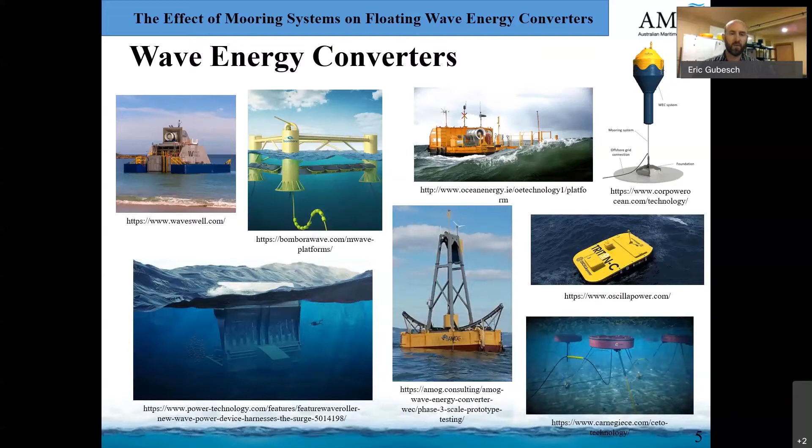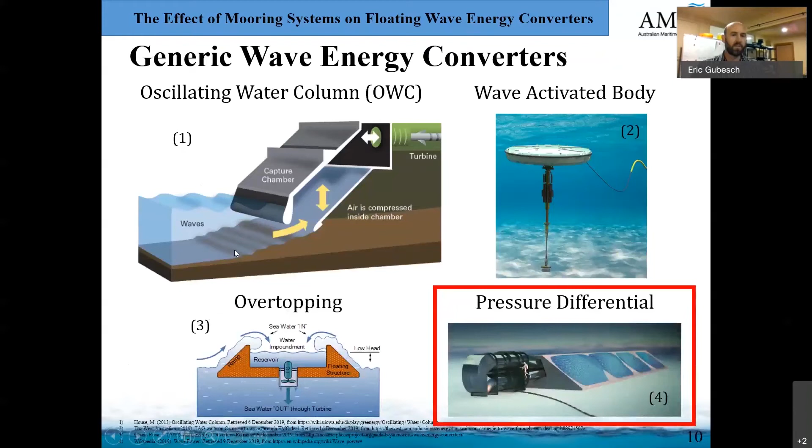So the device that I'm working with is the Oscillating Water Column. It's a very simple concept. There are no moving parts below the surface of the water. The operating principles are mechanical systems that we understand relatively well. For example, the water that oscillates up and down on the inside of the chamber is kind of like the way a piston behaves on the inside of an internal combustion engine. And the power takeoff system uses an aerodynamic turbine, which we have quite a lot of collective experience with how these turbines work.

Now, of course, there is a fair bit of learning to be taken because unlike a lot of other turbines, the oscillating water columns fluctuate relatively quickly with what the wave periods are doing. So you have different directions for how the turbines will interact with the flow of the air through the chamber.

Now, there's lots of academic research available for loads of different wave energy converters, including OWCs. But unfortunately, there are very few full-scale devices out there in the real world. And this makes it difficult to understand what the real-world performance is actually like for these devices. And when it comes to designing a new device or developing technology, performing a similar vessel analysis becomes challenging.

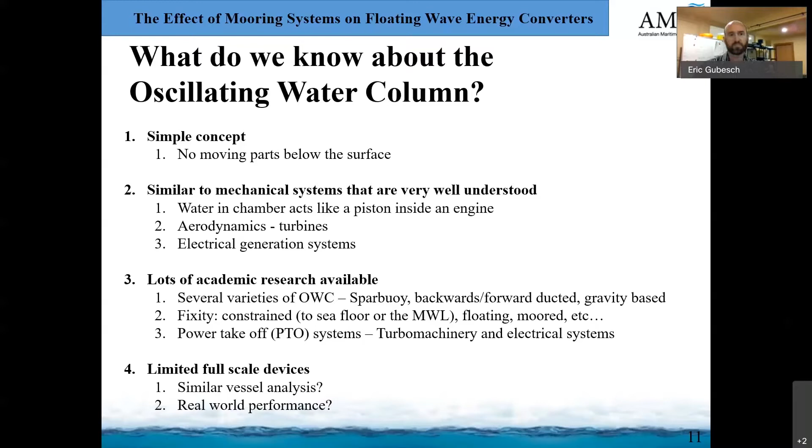So what I wanted to do was step through the design process that I used to design the device that I'm actually testing in my current studies. It's a multi-stage process.

The first thing that you need to do is design a high-performing chamber. Now, this is an asymmetrical chamber, being that the forward lip is relatively close to the water plane, and the side and aft walls of the chamber are relatively deep. This is one type of many different types of OWCs.

Once you've designed a high-performing chamber, then you need to design the external geometry that will help the chamber float, and those will govern what the motions do. And then lastly, you need to design your moorings and your power takeoff system and all the other equipment that you need. Now, it's important to note that there are no design standards for wave energy converters at this stage, which means that there's quite a lot of uncertainty in how these designs actually work.

And so I have some pretty major questions that I'm investigating. The first one is how does motion affect the hydrodynamic performance of these devices? Is motion a good thing? Is it a bad thing? What types of motion do we want to encourage, and what kind of motions do we want to repel?

Now, when it comes to motion and wave energy converters, it depends on the type of device that you're building. If you're trying to make a wave-activated body, then motions are good because you can generate a lot of kinetic energy and convert that to electrical energy. But for some wave energy converters, motion is bad because that motion dissipates the total amount of energy that's available, and that reduces the overall performance of the device.

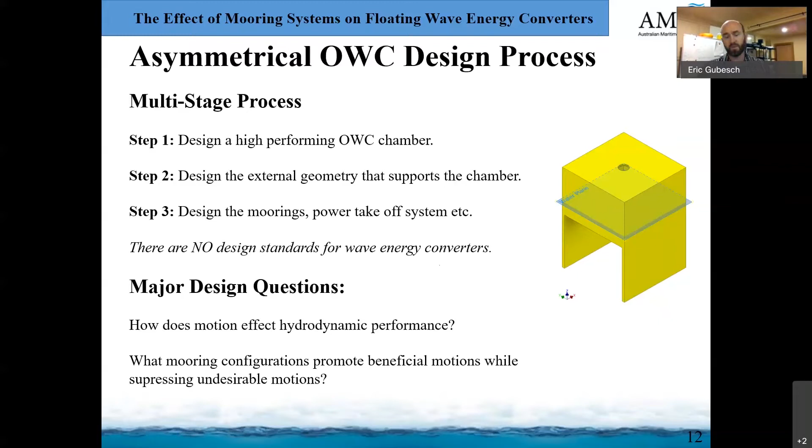And then when you start to think about floating structures, you're going to have coupling between different degrees of freedom. So you're going to have heave and pitch and surge and a whole lot of different degrees moving at any one time, and how those interactions affect the performance is difficult to know. So once we understand the effect of motion, we want to know what mooring configurations will promote beneficial motions and suppress those undesirable ones so that we can find a balance between improving performance yet surviving extreme sea states.

Now, to design one of these OWC chambers, there is heaps of really good information. There's a gentleman, Ahmed Elhanafi, who did quite a lot of work in his PhD on oscillating water columns before me. And a lot of the work that he's done has focused very heavily on the performance of these chambers.

Now, the process that I went through basically was to identify the peak wave period and the significant wave heights for the operational conditions and the survivable conditions at a general location where this device might actually go.

Now, the device is not being built for a specific location, so the significant wave height and peak periods are typical for the east coast of Australia. Now, the chamber length of the device is relative, or the optimal chamber length is relative to the incoming wavelength. So what you do is work out what your wave period is, work out what the respective wavelength is.

And then the chamber length should be about 12% of what the actual wavelength is. Once you've got that main parameter sorted out, then you need to start adjusting the forward lip, the depth of the side lips, and the width of the chamber so that you can match the natural period of the water that moves inside the chamber with the peak wave period. This way, you've got a chamber designed to absorb maximum energy where the maximum energy is actually available.

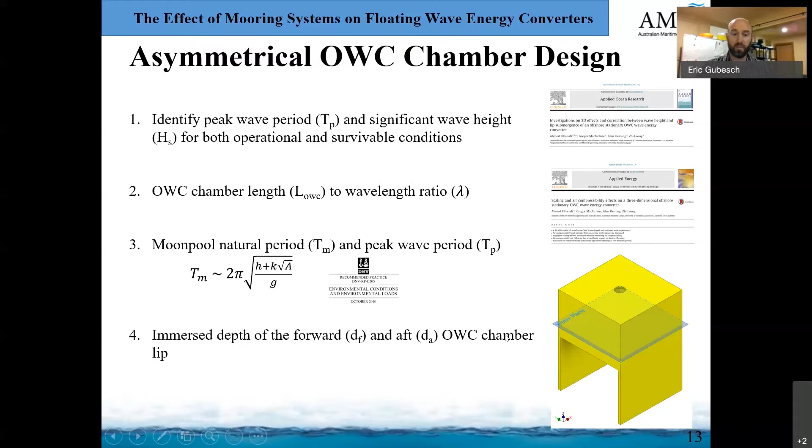Now, when it comes to predicting the performance, there's a very good bit of research that was conducted, essentially an empirical model where you can take a bunch of equations, put them into a programming language where you can change the different geometrical parameters, and it will give you a prediction about what the performance does. Now, I used this and then validated the performance with a CFD, a computational fluid dynamics simulation, and it worked — it was quite accurate. So this is not a bad way of looking at things.

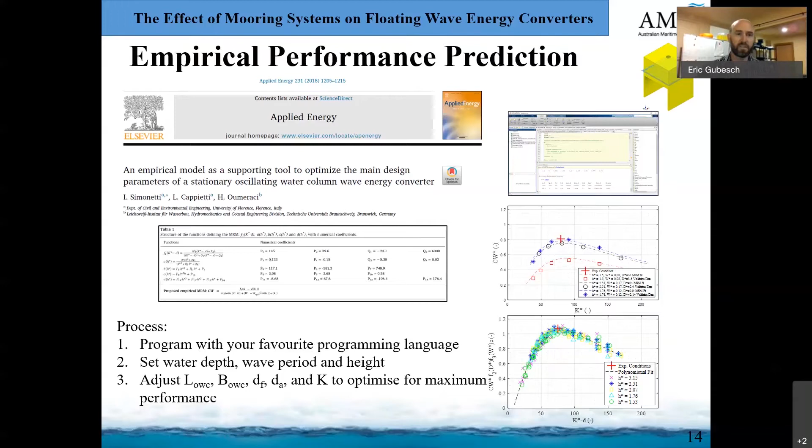Now, some people are starting to look at the effect that external geometry has on the performance of these devices. The author of this work has been looking at how these harbour walls increase performance. What they essentially do is take wave energy from a wider region and concentrate it along the forward wall of the OWC chamber, which is great because in the operational condition you can make more power. But in the survivable condition, you're going to concentrate an enormous amount of energy onto that front wall, which may be detrimental, depending on how the design of the structure actually copes.

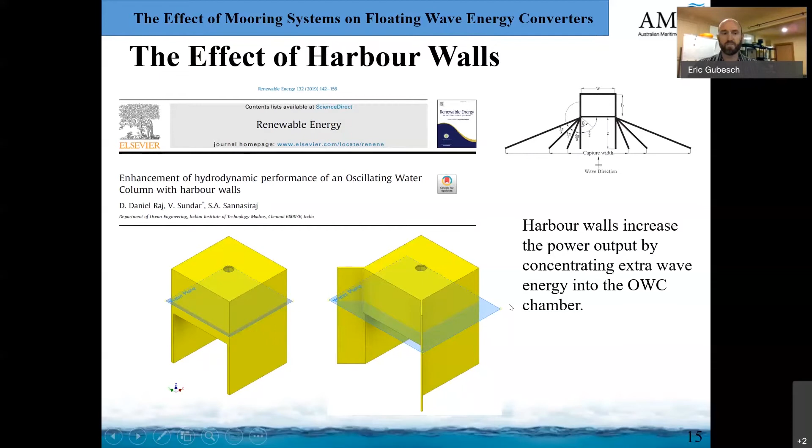Now, a little bit further with the external geometry, some of the design unknowns — there are no design standards at this stage, nothing from DNVGL, nothing from API. And that leaves a lot of questions like: what are the natural periods that we actually want to design these devices to? How stable does the structure really need to be? Normally they're unmanned, so we don't want the thing to capsize, but motion is likely to happen. Do we need reserve buoyancy? What sort of topside payloads do we need? Now, remembering motion is a really important part — do we want motion or do we not? It depends on how the structure actually performs.

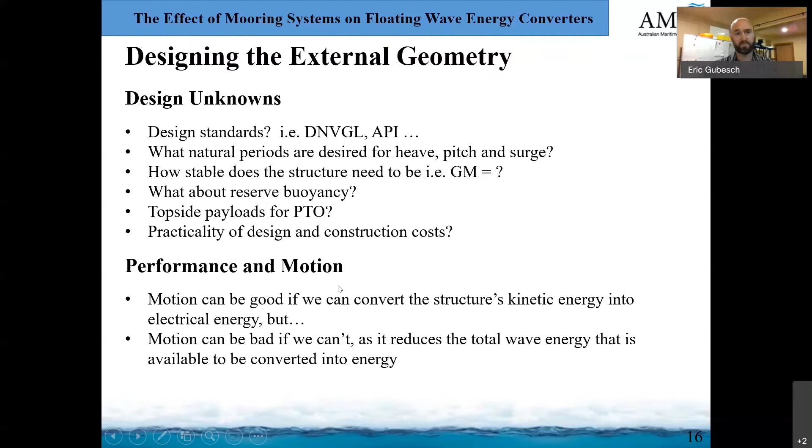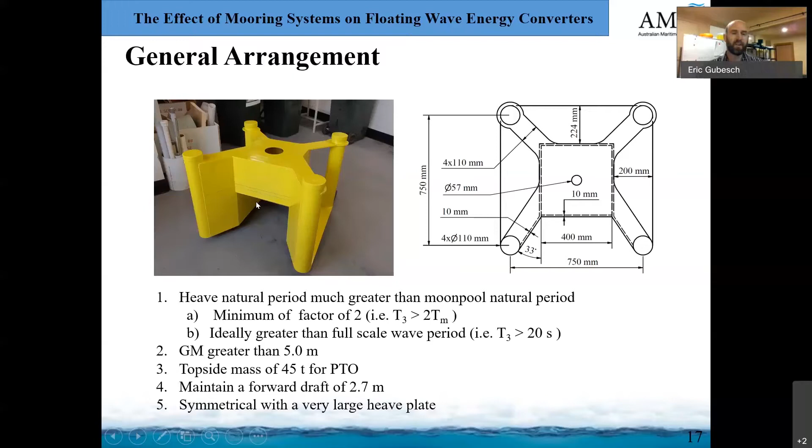Now, this device has been designed so it has a GM greater than 5 metres. It can accommodate a 45-tonne topside mass. The forward wall has a draft of 2.7 metres, and it's symmetrical along that plane.

Now, the experiment that I set up was based around understanding what we actually want from our mooring systems. Now, to begin with, I set up three different conditions.

It was tested in 39 millimeter, 50 and 60 millimeter regular waves across a wide range of different wave periods. What this fixed condition did was give me a very good baseline about how it performs, but also how the fluid interacts with the chamber and how the power takeoff system may actually work. So it's a good baseline.

Then I set up a second mooring configuration, which was designed to allow the device to heave and to pitch, but to constrain surge as much as possible. To do this, the device was free floating, and I stuck two different moorings onto the fairleads, which were located at the center of gravity of the device on the side of the column chambers. The mooring lines were run forward horizontally at 45 degrees and afterwards.

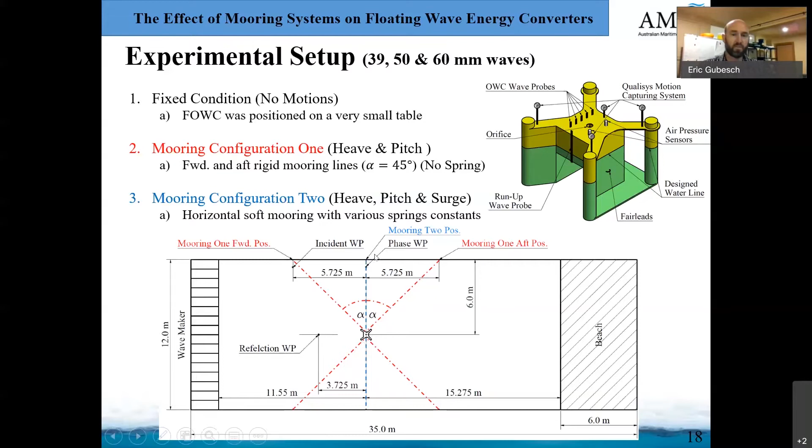Aside from the experimental fluid dynamics, I'm also using computational fluid dynamics. The data that's collected from the experiment is used to validate the computational fluid dynamics simulations, because the CFD can be difficult to get good outcomes from if you haven't got the parameters set right. Now, the CFD simulation is composed of two different types of meshes.

We have a background mesh, which contains the boundary conditions for the simulation. It contains a region for the atmosphere, a region for all the fluid, and it has the free surface interaction, or the free surface area where the waves are. Then what we have is an overset region which surrounds the geometry of the model. What the overset region does, in essence, is calculate what the fluid pressure is around the outside of the model at each time step, and then update what the motions are.

It allows the overset mesh to interact with the background mesh, so that we can essentially model what the motions are of this device and how the air inside the chamber and the waves interact with the outside of it. Now, the software that I use is STAR-CCM+, and the simulation is only half of the actual model. Because the device is symmetrical, we can save a lot of that computational requirement by only simulating half of it.

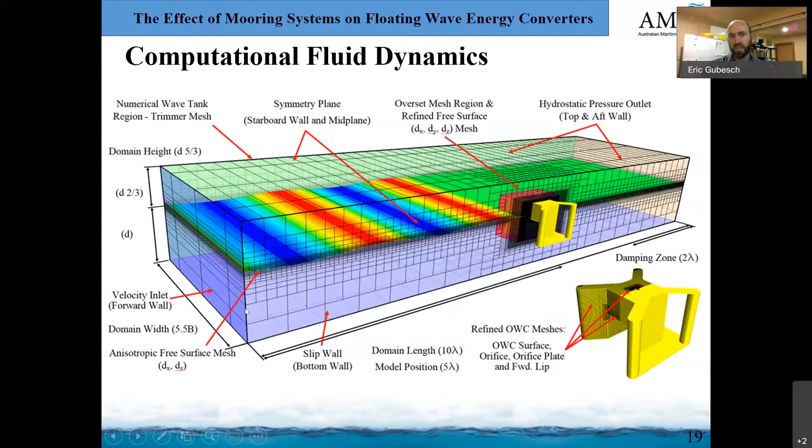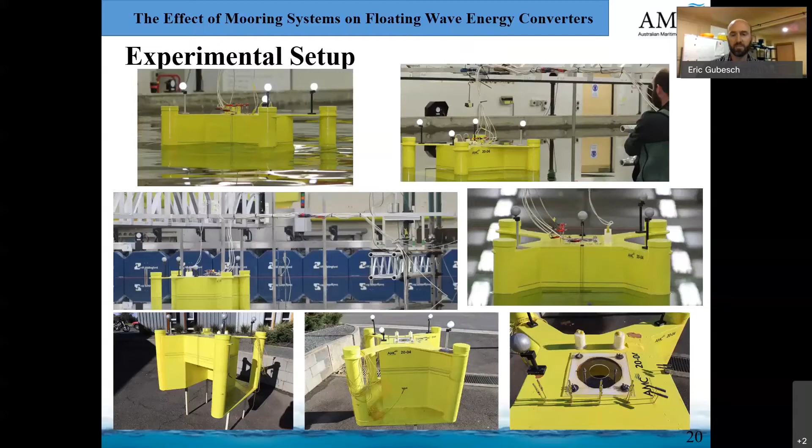Now, because we're looking at motions and the fluid motions on the inside of the chamber, performing decay tests is really quite important. What the decay test is going to tell us is what the resonant frequency is that's exciting the chamber and the actual motions of the device.

Now, if you take the data that you've collected and perform spectral analysis, what you're going to find with the Moonpool is that you have two dominant peaks.

The first big peak that you collect is called the piston mode, and the piston mode is the main body of water that's oscillating up and down. It's the piston mode that we're collecting the energy from. The peak period this occurs at, in this case, was about 1.3 seconds, which is about the area we're expecting to find peak performance for the device—thereabouts, not exactly, but relatively close.

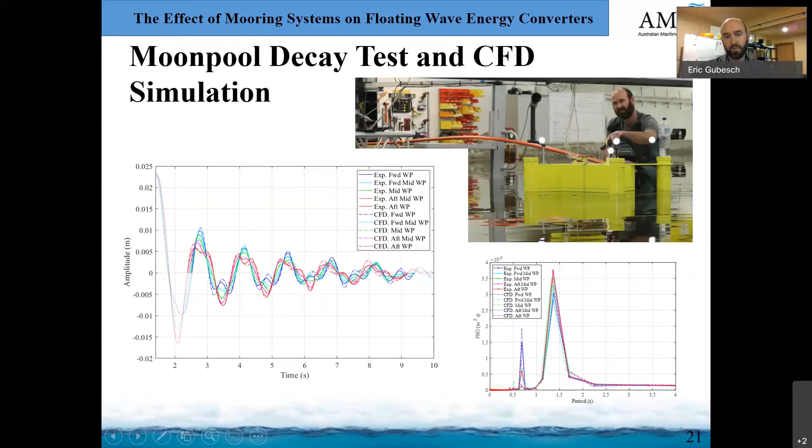Now, the second little peak we can see down the bottom here is called the sloshing mode. The sloshing mode is when we have a wave sloshing forwards and backwards between the forward and aft wall. So as the water starts running out of the front lip, you end up with a piston mode and this sloshing mode forwards and backwards. You can actually see the sloshing mode occurring mostly towards the front and back of the wall throughout the decay test.

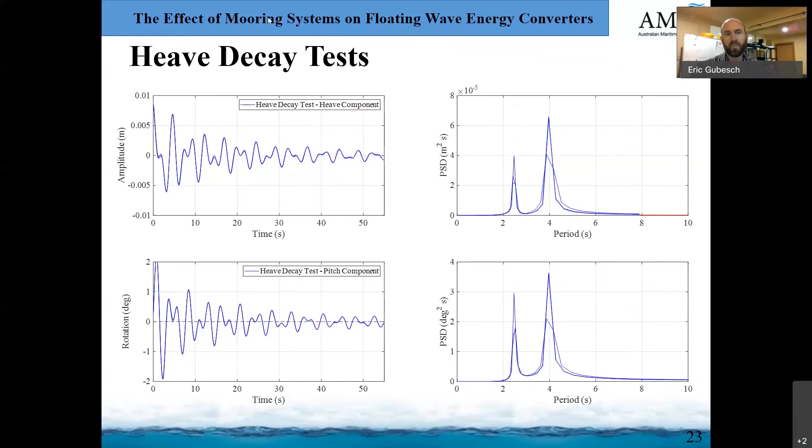So if we move across to the pitch decay test, this was a pure pitch decay test with no excitation at all in the heave. The heaving components of the pitch decay test look remarkably similar to the heave decay test, same thing with our pitching motions. What we end up with is two peaks that occur at about the same point, although they're inverse to each other. The heave decay test has a dominant peak at 4 seconds and a minor peak at 2.4, but the pitch is opposite: at 2.4 you have a dominant peak and a minor peak.

Now, if I align those two decay tests so they lay over the top of each other - they're completely independent tests, the heave decay test had 3 repeats and the pitch decay test had 2 repeats - they match almost perfectly. The spectral responses are slightly different, but the wave period is pretty much right on top of where it needs to be. They're right over the top of each other.

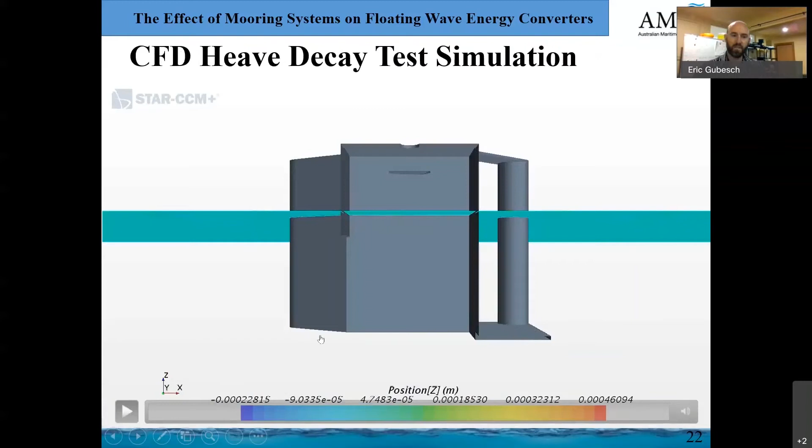So what this looks like to me is that this device does not have a heaving motion and an independent pitching motion - both the heave and the pitch are the same motion. It's largely due to the fact that the device has this big heave plate around the outside, but the front chamber is wide open, offering no resistance. So as the device moves down, there's more resistance on this side rather than that side, which creates the pitching motion.

So what the harbour walls do is, at that instantaneous moment when that water is up high like this, there's increased hydrostatic pressure, which forces extra energy into the chamber. This has a very big effect on the pressure inside the chamber and the flow rate of the fluid as it moves through the orifice, and it has a large impact on the performance of the device.

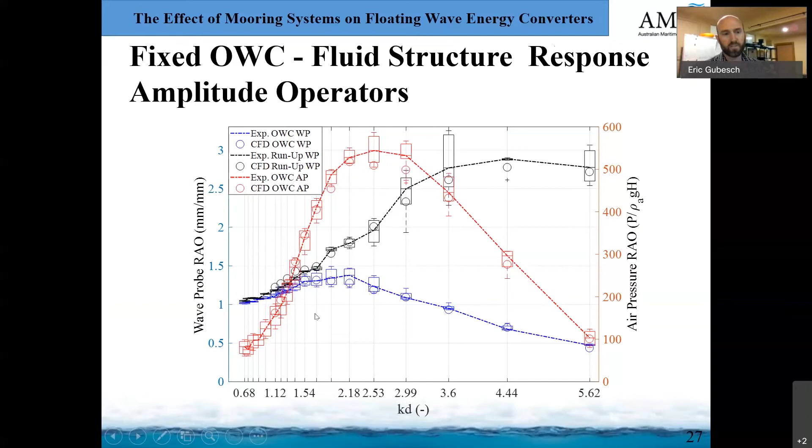We also see that the peak air pressure across those different wave frequencies is actually a little bit higher than what the natural frequency and peak pressure inside the OWC chamber is. Now, it seems to me that the run-up has an impact on what this pressure is actually doing, but it requires a little bit more research to really understand this interaction because it's rather complex.

Now let's have a look at the turbine damping coefficient. This is quite important for the power takeoff. The turbine damping coefficients are basically the amount of resistance that the turbine and power takeoff system will have on the fluid on the inside of the OWC chamber.

Now there are 2 cycles that are of importance. We have a cycle where the water pressure or fluid motions on the inside of the chamber are increasing, and this is pushing air out of the chamber, or basically the chamber is exhaling. Then when the water level falls, air is drawn into the chamber, and we have an inhale cycle. For most operational conditions, we have pretty good agreement between the inhale and exhale cycle at somewhere around a turbine damping coefficient of 500, thereabouts.

However, at this high frequency position, for one reason or another, there is a very large separation between the inflow turbine damping coefficient and the outflow. This could cause a whole lot of different problems for the actual turbine design, because if you're designing a turbine to operate in these conditions and you end up with this large variation, you may not absorb a whole lot of energy because the turbine isn't designed to work with that range of conditions.

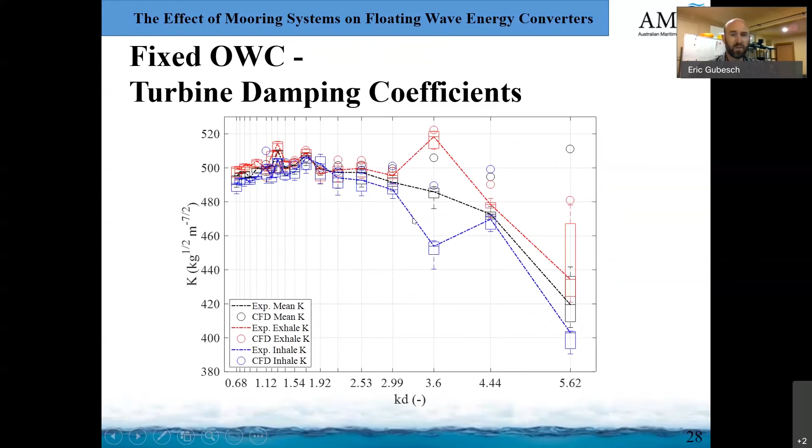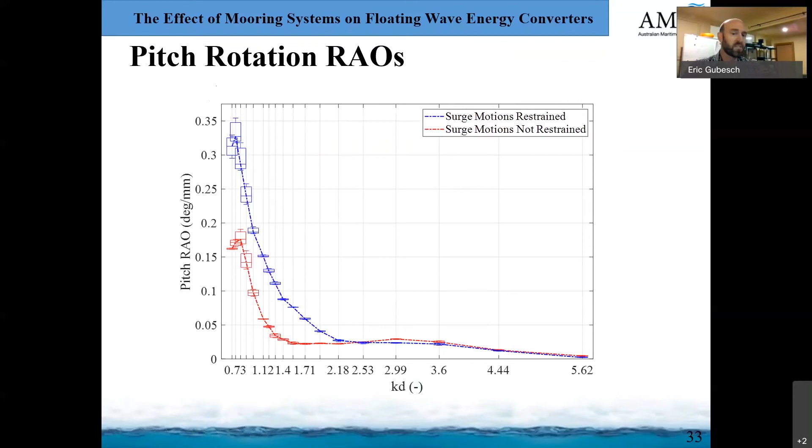And the same thing for the pitch motions. If we constrain surge, we increase the pitching motions. And then when we think back to how this affects the performance of the device, we don't know if the larger motions are good for converting kinetic energy into electrical energy, or whether we're going to dissipate the energy. Perhaps these larger motions are parasitic - difficult to tell.

This is not because we can absorb more energy than is in the wave by magic - it's because we're concentrating additional energy from those harbour walls. If we made the harbour walls even wider, the device would probably absorb even more power. But either way, to be able to absorb 150% of the energy is a good baseline to work with.

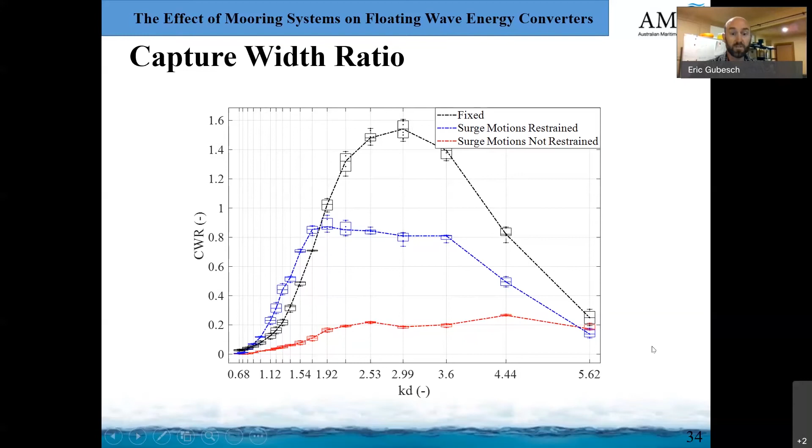Now, if we allow surging motions, the performance of the device drops out immediately. We're down to about 80% of the energy that we could have absorbed if the device was constrained completely so it can't move. This indicates to me that surging motions are not good - they're not the sort of thing that we want. We want to design moorings that are going to constrain those surging motions, because what we really want is up to this 80% or even higher.

So what can we conclude about this? In general, motions for this type of OWC are undesirable. We don't really want them if we can remove it. Relative to the fixed condition, we can expect about a 40% reduction if we constrain surge but let it heave and pitch. And if we let it surge, heave, and pitch, we're going to lose about 85%.

Now, in other work which I'm not going to present too much on here today, we looked at designing a catenary mooring system to see how that would affect the motions. What we found with the catenary is that it would enable quite a lot of motions, which basically eliminates it from further research for what we're doing, because we already know that surge, heave and pitch is not good, and we're going to get those kind of motions with our catenary.

What we're looking for are moorings that restrain motion, which are more likely to increase the hydrodynamic performance. So at the moment, I'm currently testing in the model test basin a vertical taut mooring system, kind of like a tension leg platform. Essentially we've got a mooring line that runs straight out of the bottom of each of the cylinders to the floor, and the device is taut. Then a second mooring where we have another taut mooring, but the moorings in this case run at 45 degrees from the fair leads on the columns down to the seafloor.

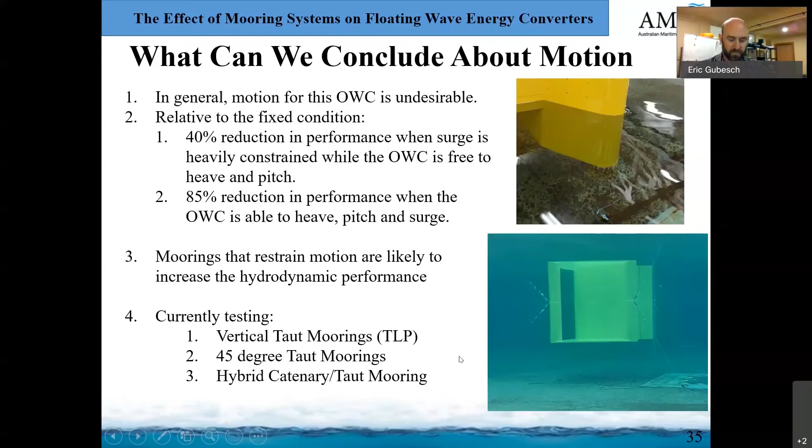And then thirdly, we'll test a hybrid catenary / taut mooring, which will likely be a taut mooring at that 45-degree angle with a very heavy catenary down the bottom here. This may allow a little bit of compliance in the system. So that's the operational side of how motion affects the performance.

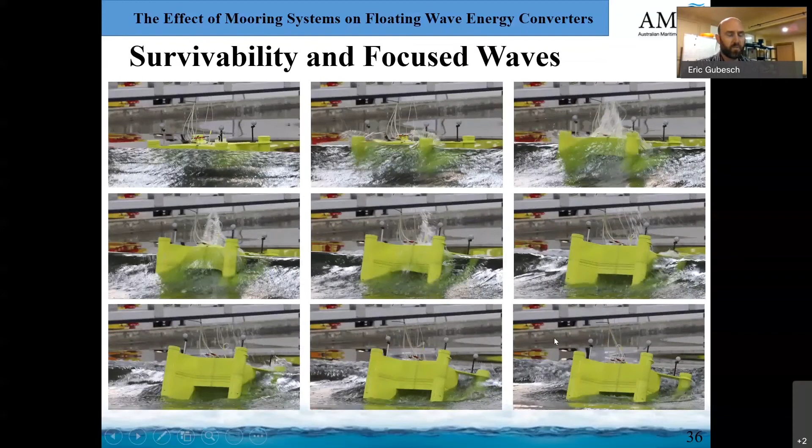But what about survivability? What about extreme waves? What I've got here is a series of photos which show a wave that was generated with the NewWave theory. This wave basically sets up and then breaks and slams into the front of the device. These photos were taken when the device was softly moored to observe how it moves.

And just a couple of days ago, I made a very similar wave with a tension leg platform. Hang on a second. And then slammed it into the front of the device.

Now, if we look at that a little bit slower... sorry, this is not the right one. Let's try this one. Right-o.

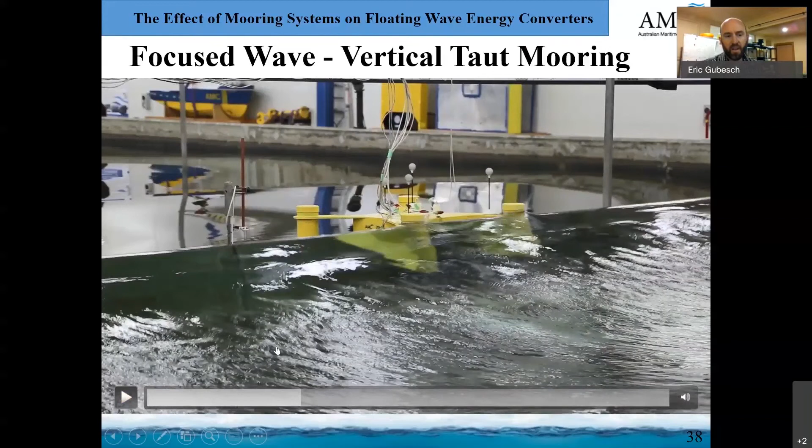So here comes the wave, and it slams right into the front of the device. So what are the effects on the moorings? As that wave sets up, we can see it starts to interact with the columns, starts to concentrate, and then in the sound you can see there's a pocket of air in the front of the chamber, and then you end up with this large slamming, smashing into the front of the device.

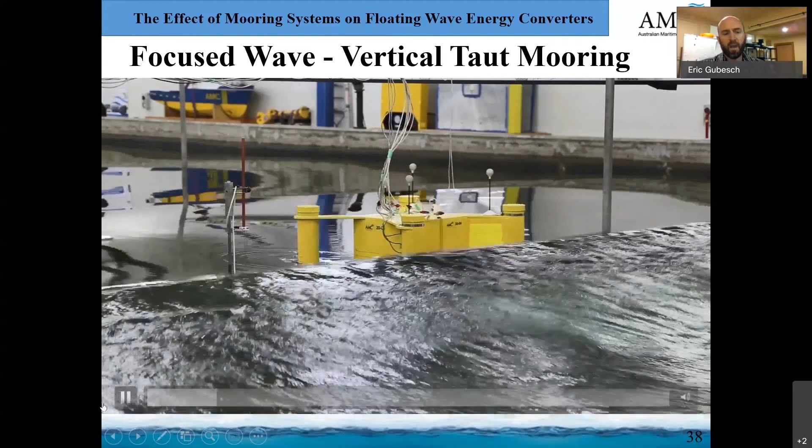Now, on the side of the device here, what we have are pressure sensors that are designed to pick up what the slamming forces are for that wave. That'll be the subject of a little bit later on once we've analysed this information.

This was done not very long ago. So what did it do to the moorings? This is what the shape of the wave looks like. It's highly nonlinear. The wave is approximately 300 millimetres, it set up and broke right on the front of the device as it was.

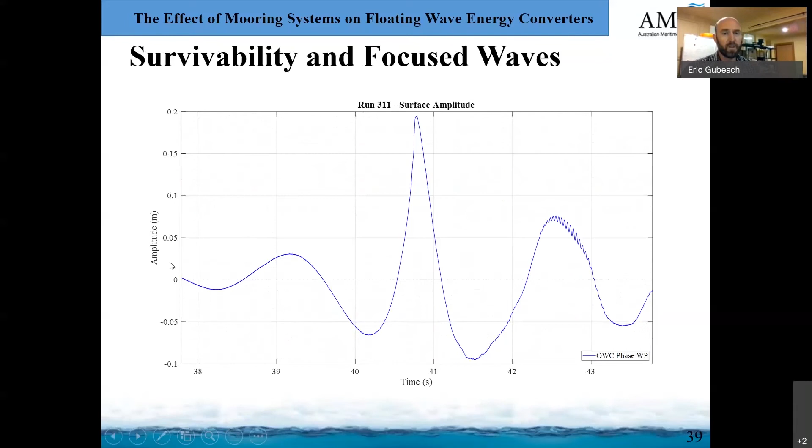Now, when you look at the survivability for the OWC, the orifice is actually closed. So it's not open like what I explained before, it's closed off and sealed. We're trying to prevent the motion of the water on the inside of the chamber from affecting those moorings, because if we open up that motion, the mass of the water that moves on the inside of the chamber increases the load on the moorings enormously. Easily.

So for memory, we're talking about 8 to 9 kilos of load. I think we were getting about 14 kilos of load in each mooring line just by opening the orifice up. So that survivable condition is really quite important to make sure we can shut these devices down. Otherwise, it's unlikely they're going to survive a wave like that.

And that's basically where I'm up to. But before I finish, I'd like to thank Greg and IMarEST for their support through my PhD. I'm very, very grateful for that. And I'd also like to acknowledge the support of my supervisors who have always directed me the right way.

Thank you very much, Eric. A terrific presentation. I look forward to seeing the complete results in the future so that it can direct the way in which these water column generators are actually moored.